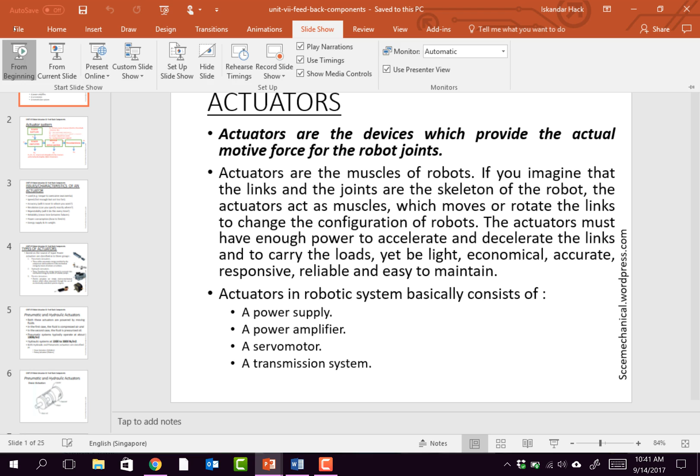So let me do the slideshow from the beginning. This is only like 25 slides. Let me go through them. There's display settings, let's duplicate that. Okay, so both slides have the same thing.

An actuator is a major part of any robotic system. We've already talked about the arms and the various other parts. I'm not going to review those, but the actuator is one of the things that will show up on the final exam, in this set of slides which I'll post later on VLE.

Come on in. Looking for the wrong class? As I said, I didn't have a pen to write on the board, so hopefully if anyone else comes, they were late and they missed us.

Actuators are what actually moves the arm. Typically they have multiple parts: a power supply, a power amplifier, servo motor, transmission system. These are all various parts. I didn't bring the motors with me, I meant to, but that's okay, you'll see them on the robot anyway.

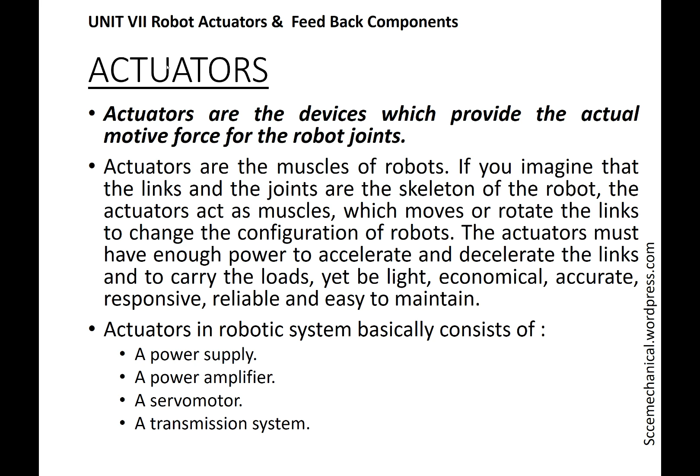You've already seen them. But again, typically when we look at the actuator system, we have a source of power. This source of power can be one of 3 types typically, although there are more: electric, pressurized fluid in terms of hydraulic fluid (although water can be used as actuation), or compressed air. Now, the robots we're using in this class use electric.

We have the input control power, usually electric. That's actually the information that comes from the computer, the microcontroller. So we have some power losses. I'm not going to get too wrapped up with that. This particular set of slides goes into more detail. My pen doesn't like this, I'll just use this instead.

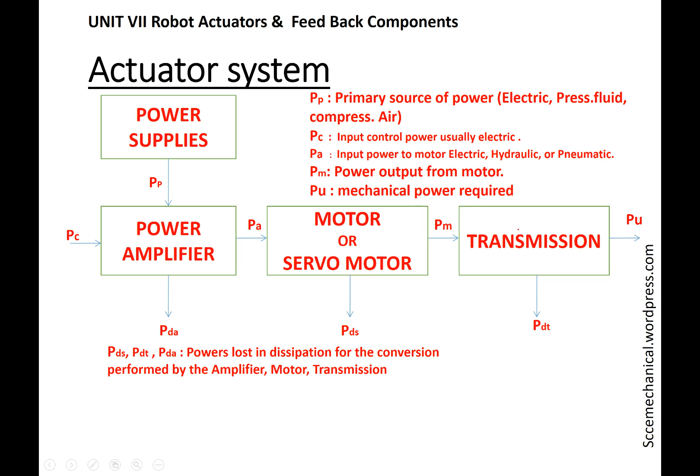These 3 all refer to power losses when we look at the efficiency. I'm not terribly worried about the efficiency for this discussion. Our power amplifier then goes to our motor or servo motor. Now, this motor may or may not be electric. So this power amplifier may actually open a valve, and then this goes into our transmission that actually drives the arm or the end effector itself. So this is a typical block diagram.

Some characteristics we have to deal with: what is our load. Obviously, you need a different type of motor if your goal is to pick up a tire on an assembly line than to pick up a small piece of an IC to make silicon chips. If you're at Intel making microprocessors, your actuator can be very small because you're talking something that weighs way less than 50 grams. But if you're putting tires on a car at Proton, you're looking at something that weighs 10, 15 kilograms.

Speed: fast enough, but not too fast. Obviously, if you're in manufacturing, you want this thing to move as quick as possible, but not so fast that you can't control it. Accuracy: accuracy is different than resolution.

Repeatability, accuracy, and resolution all three come together. Accuracy is how close you get to what you want. Resolution is how tightly you can control it. So if you're trying to put together an automobile, plus or minus 0.1 millimeter might be accurate enough for placing a door. If you're placing electrical bond wires on an integrated circuit, 0.1 millimeter is way too far apart. And that's where the resolution is - how accurate does it need to be. And the repeatability is how well you do it.

You've got a target right here, here's the bullseye. Accuracy means that I can get into the bullseye. Repeatability means that I can do it every time. Now, I can be very accurate, but be hitting all around the bullseye, never hitting the bullseye itself.

My resolution is poor right there. I'm very accurate and very repeatable. But if I got a grouping over here, it's very repeatable, but my accuracy's off.

I'll use a GPS as an example. A GPS is a global positioning satellite system that has 3 satellites looking down from space. Your car sends a signal out and gets a direction from each satellite, and it triangulates between those 3 satellites, more the better, to determine your position.

Now, these satellites are owned by the U.S. military. They're not put up there by some international UN committee. They were put up there for one goal only, and that was military purposes.

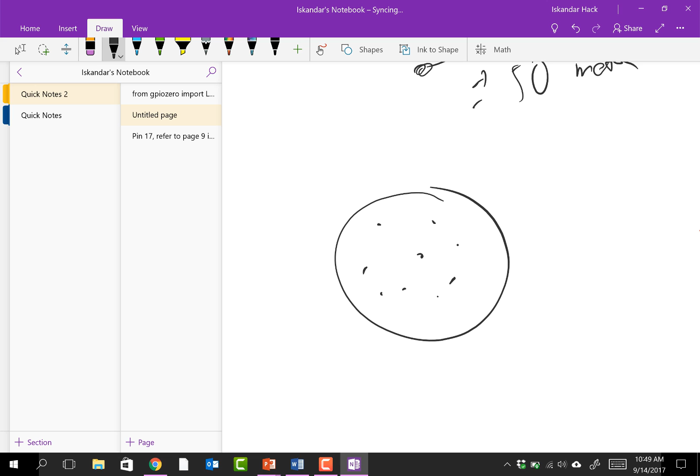Going back to why GPS was opened up: there was a South Korean flight supposed to go to the U.S. that went off course and flew over the Soviet Union because of an error in their navigation system. GPS was not open to civilian use at that time, and Russia shot it down. This was back in the 1980s.

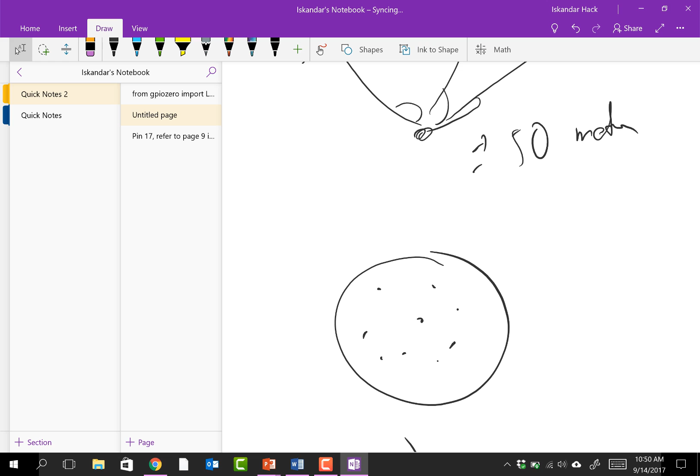After that, they opened up GPS for civilian use. But when they did that, they deliberately put in an error of plus or minus 50 meters. That's where this resolution concept comes in.

So repeatability is: is it going to work the same every time? One of the things you'll find when you do the lab I'm going to talk about is that these particular servo motors aren't very repeatable. They lack feedback.

Reliability means mean time between failures - how often does your robot fail. And power consumption - how do we feed it, how big a power supply we need.

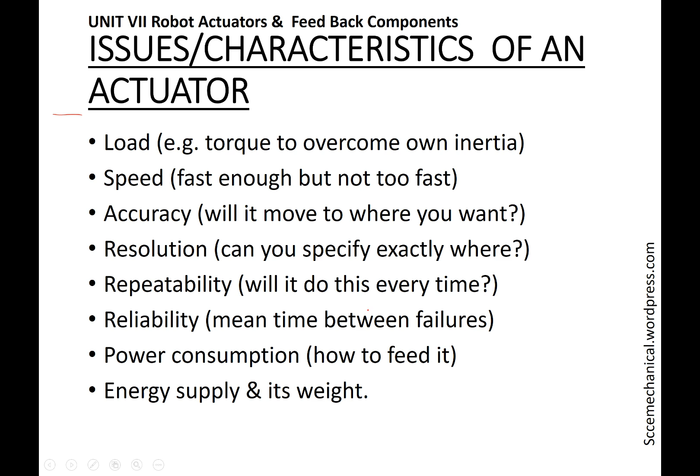Pneumatic actuators utilize pneumatic energy provided by a compressor. It performs as mechanical energy. This is very common in small robotic type systems. If you go to Intel, Freescale, or any of the IC manufacturers like Texas Instruments, you'll find that a lot of their actuators are pneumatic. The reason is because if you're dealing with ICs, the last thing you want is any kind of electricity around there.

Static electricity causes problems. And you don't need much energy - integrated circuits or chips are very light, so you don't need a lot of power. So they tend to be fairly small.

Hydraulic actuators use a type of fluid or oil. You'll find these in a lot of very high energy, power type things. In an automobile plant, they use a lot of hydraulic actuators.

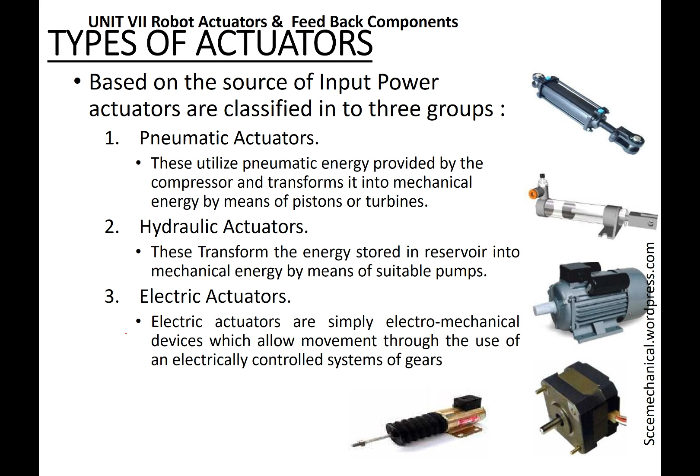Pneumatics and hydraulics are powered by moving fluid, and they both fall under the category of linear actuators and motors, the difference between that. You need to know this as well. By the way, I only have like a week or two of robotics, and we're going to switch over to industrial automation, where we'll talk about PLCs.

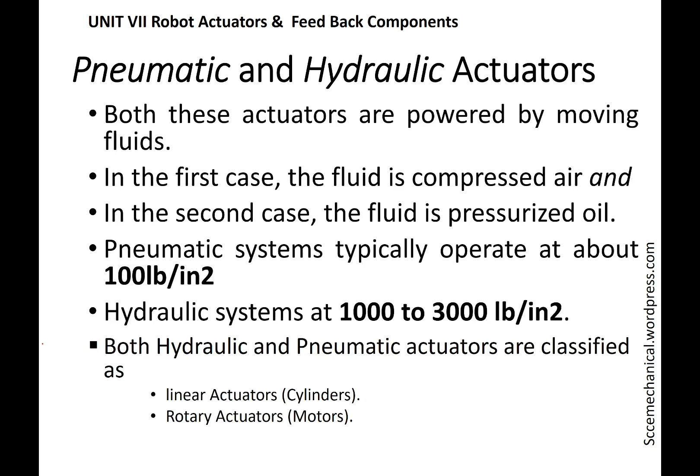So here's a linear actuator. You have a piston, a fluid port there that we push fluid into to push the piston out this way. This is similar to the way that the rack and pinion would work on your power steering.

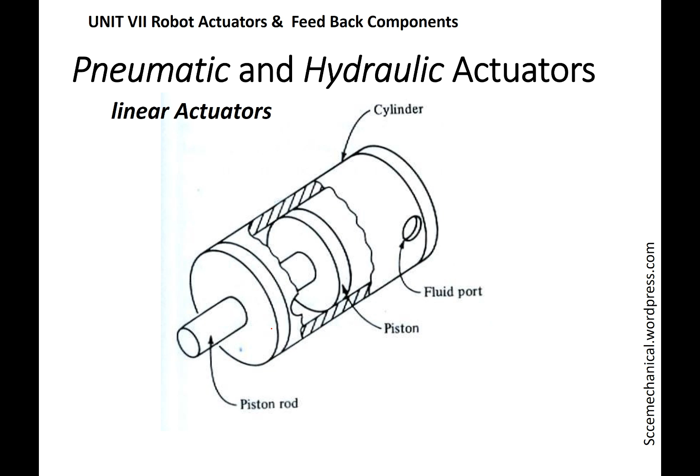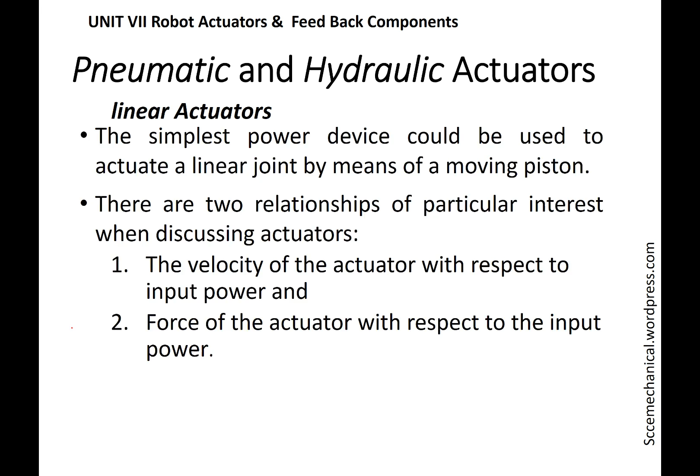Again, they both work on the same principle. Air is a fluid, water is a fluid, oil is a fluid. They all work on the same principle. So the simplest would be to actuate a linear joint by a moving piston. I'll skip all these formulas, you don't have to know the formulas.

This gets into the rotating, where we've got a vane that we push fluid into, and it comes out the other side, and this rotates it. Again, this is a type of rotating motor that uses oil or air as the actuator. Again, it's the same thing.

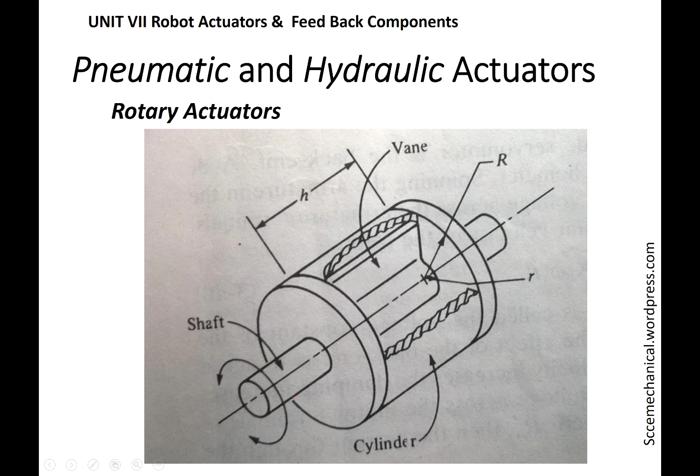So we've got this shaft that rotates left or right, depending on which direction we push the fluid into. Again, I'm not going to go into the formulas. These are pneumatic. This slide is one you probably want to look at, because I'll ask about the advantages and disadvantages of various types of actuators, and it's all covered in this slide.

What I was going to say, and I got sidetracked about the brake shoe factory, we would every now and then run into a problem where a hydraulic fluid or hose would break or start leaking. We would end up with a huge pile of oil on the floor. Or worse, somebody would get sprayed with high temperature oil and be injured. We've never had any serious injuries, although one guy got it in his eyes, and we got him under the eye wash fairly quickly. He didn't lose that.

Changes in temperature. This is not a problem in Malaysia, but it was a problem where I was working at the time in Indiana, where we didn't necessarily heat our plant very well. We had some machines around the windows, and it gets to minus 15, minus 20 degrees inside that plant. We're talking Fahrenheit, so considerably colder in Celsius. Although minus 20 is probably, minus 40 they're the same. It didn't get to minus 40 very often, but you'd see minus 30 Celsius fairly regularly. So if the fluid got to minus 30 or even zero, it would get really thick and sluggish and slow the motors down. That was a problem.

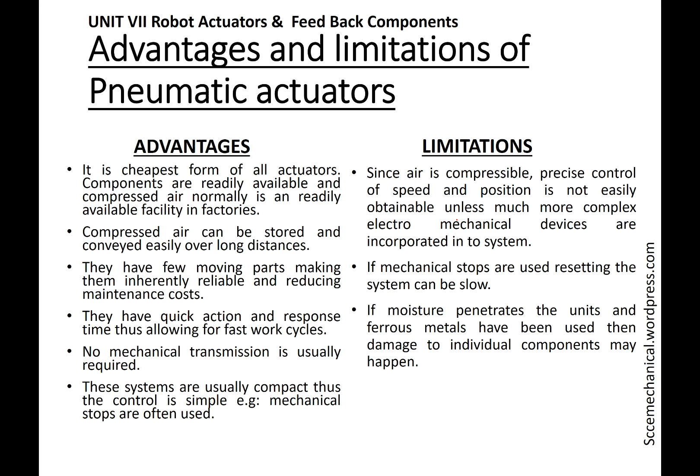Both the hydraulics and the pneumatics actually have a problem they don't mention here: the noise. Sometimes you'll hear that every time you use it. The hydraulics, it's pretty noisy at times.

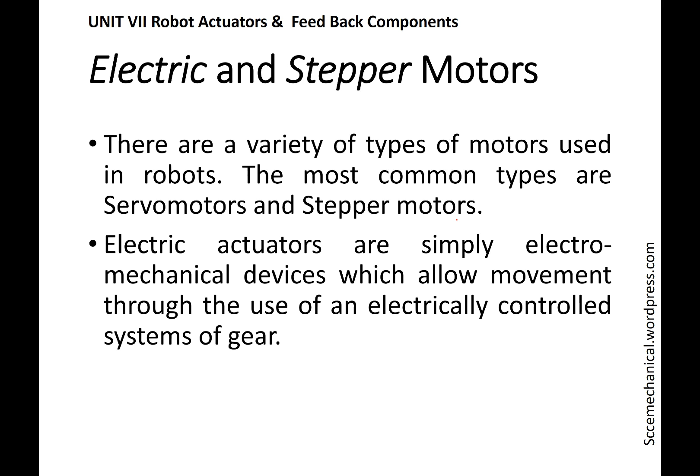So electric, there's basically three types of electric motors. There's the standard DC motors that they don't talk about much here, the servo motors, and the stepper motors. But they're electrical mechanical devices. You take lots of courses in motors, so I'm not going to go through a great deal of those. But they can be used for everything. You'll find motors in everything.

My car back in the U.S. had a little electric control on the seat. I could move it forward, backwards. My Perodua is not quite as nice, I have to move the seat manually. My mirrors I can adjust electrically though. Everything in my car, I don't have a sunroof. Sunroofs are a pain in the neck. Don't buy cars with sunroofs.

But the blower motors and the engine cooling fans are different than the seat adjustments and the power windows and the mirror adjustments, because those just spin and we don't care about how fast they spin as a general rule, we don't care about position. But obviously, adjusting your mirror so you can see the cars behind you electrically, you need to be able to control the position of that motor.

Same thing with medical equipment, x-ray equipment. I had the pleasure, and I use the term loosely, of getting an MRI back in April. MRIs use a lot of motors that rotate around and take pictures of your brain. They actually found a brain there, but they also found little spots where I killed it. But some of this equipment has to be very precise, especially medical equipment, and especially with robotic surgery being done.

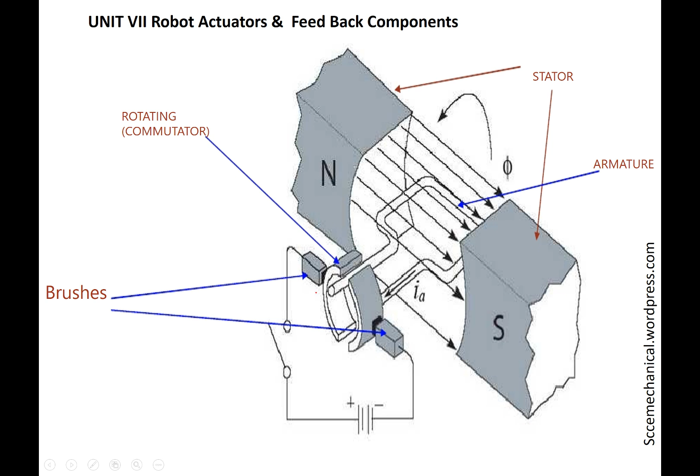That's basically how a motor or generator works. You have a rotating armature inside a magnetic field that will either, if we apply mechanical force and rotate it, act as a generator. If we apply electrical force, then it will rotate on its own, that's a motor. And this is a DC motor with brushes, a very basic DC motor.

Components, again, I'm not going to go through these slides. We've got three types of motors they talk about here. A DC motor just simply rotates, and we can control the speed of the motor various ways. The most common way is by varying the DC voltage to it. However, if we're doing microcontroller processes, we use something called pulse width modulation, which I'll talk about after the break. AC motors are a little harder to control the speed. Normally you use what they call a synchronous motor, and control the frequency.

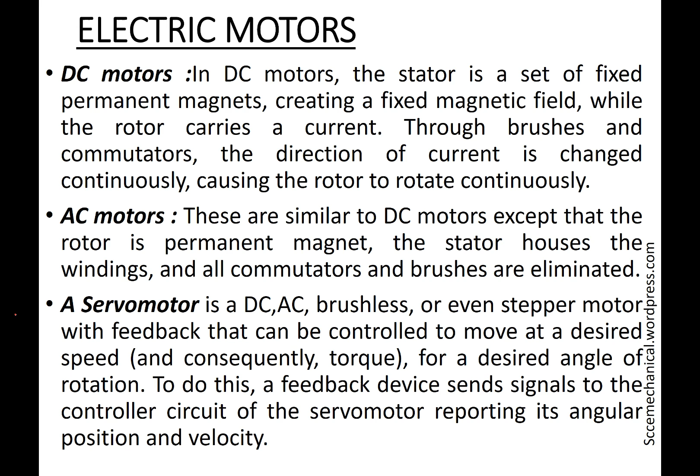A servo motor can be DC, AC, or even some other motor type when we have feedback. Now, the motors that we're using are servo motors, but we're not using any feedback with them. That's it for that topic.

Components of a DC motor, right there. Let's get into it.

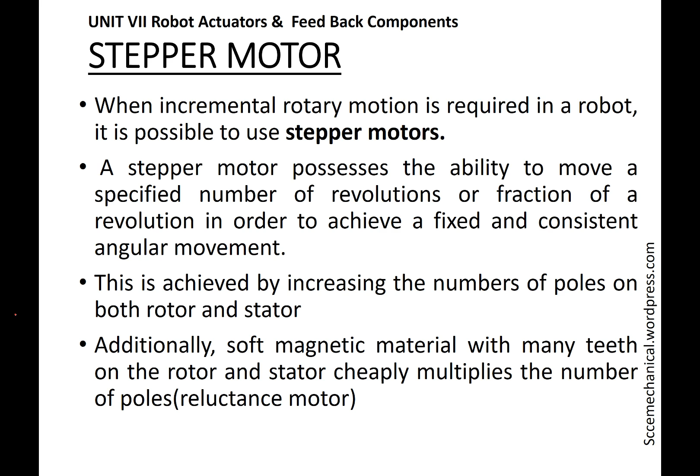We're looking at the step angle, the number of steps, and these are the number of poles. We have various poles, and we can energize two of them, then energize another two, which causes a turn. As we energize different pairs, you can see it rotating around, actuating various ones.

This is kind of a neat little slide. Again, I'll post the slides up on BLE.

With the stepper motor, we're not using stepper motors with our labs, but I've used stepper motors in the past for various projects, and they're a really neat way of controlling things.

My old satellite dish at my house used a stepper motor to control its position. The dish would point to different satellites in the sky so I could pick up different television stations. It was on a pivoting arm that would simply rotate, and I'd tell it to set to, say, 68 degrees, and it would point to a satellite 68 degrees off the horizon, or 90 degrees, pointing straight up, or 120 degrees.

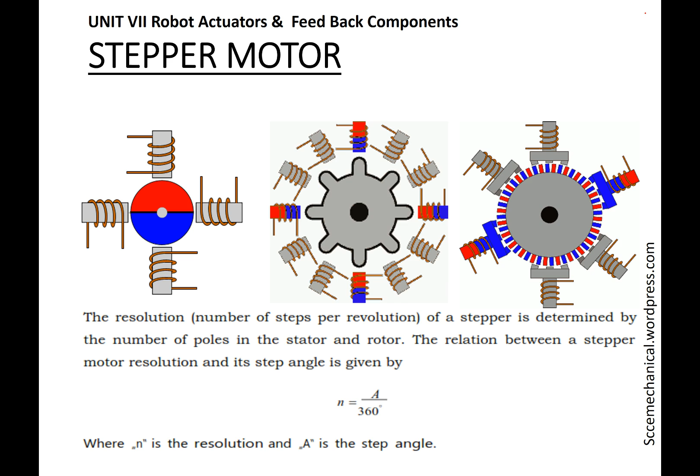But the problem you run into, since there's no feedback, is I'd have to calibrate it once in a while. Fortunately, my receiver had a calibration function where it moved to one direction, which was 0 degrees, then totally the opposite direction, 180 degrees, and it would recalibrate the processor to know exactly where it was.

Again, this covers the advantages of electric motors - they group all the electrical together in this slide.

We have a wide variety of power supplies. The basic drive unit is usually lighter than fluid power systems. They are more efficient, and they don't have any pollution - you don't have to worry about oil getting on the floor. They are typically more repeatable and accurate than fluid or pneumatics. Both hydraulics and pneumatics have to be calibrated.

And there are some limitations in terms of power, right there. The transmission system can be tricky, and they can't be used in some environments. I mean, if you're dealing with the handling of gasoline, you probably shouldn't use electric, because electric motors tend to have sparks when they move internally. So it's supposed to be environment-specific.

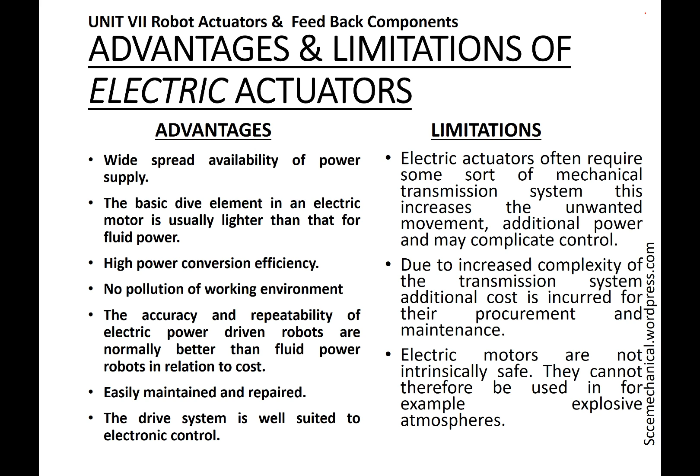Again, this slide, along with those other 2 slides, you'll need to know. Applications right there, and they give an example. This is for steppers, printers, the old printers. Now the laser printers don't use stepper motors, they use servos, but the old dot matrix printers did. Plotters, medical equipment, fax machines will use them too.

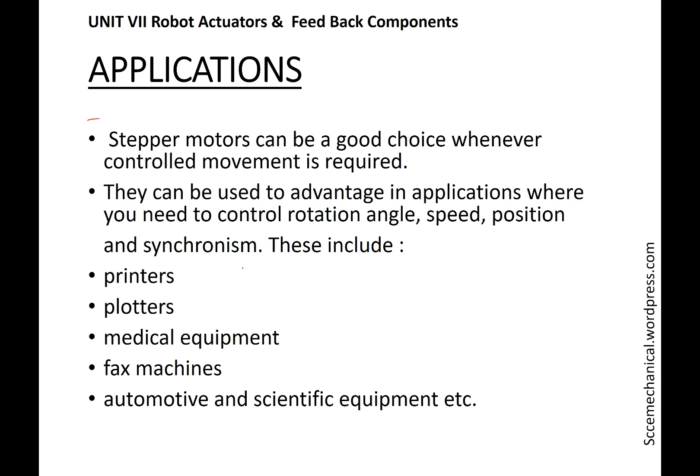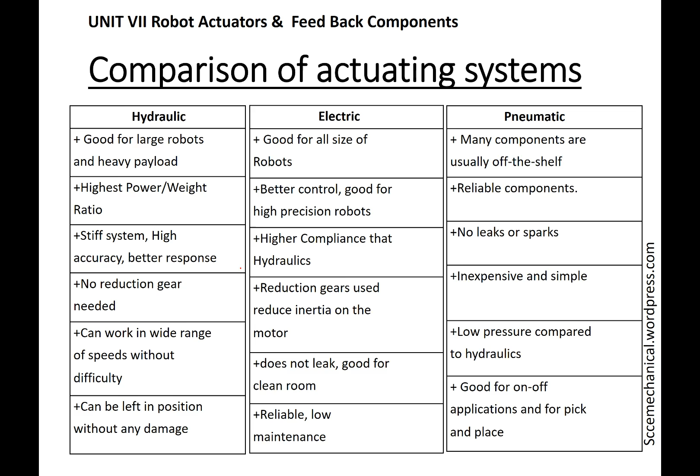Again, this is actually a fairly good slide right there. I'll probably steal parts of it when I write the final exam. Hydraulic, again, we get into all the various comparisons right there. So we've got 2 slides that go through that, and that's it for the slides.

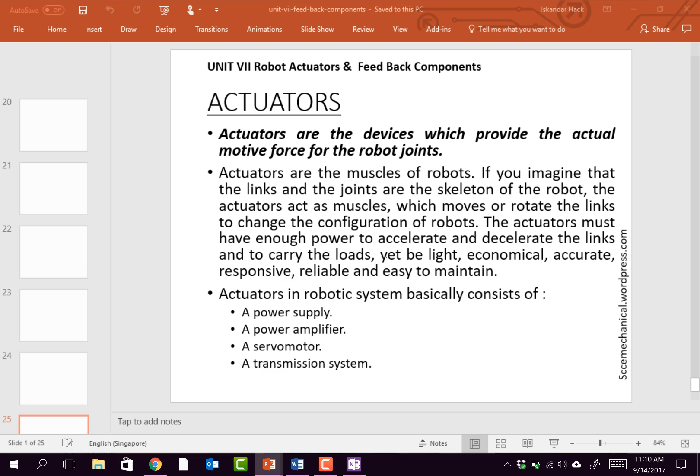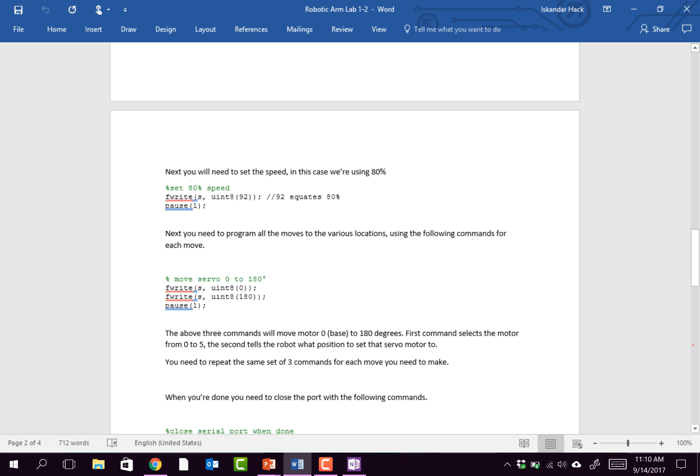Now I'm going to just talk a little bit about the lab. I'll come back, I posted the lab. You already did the first part of the lab. There is a little file I give you, and I go through step by step how to talk to the motor. We did this before, I did it in class, but now it's been 3 weeks, so I've really forgotten it, so I put it there.

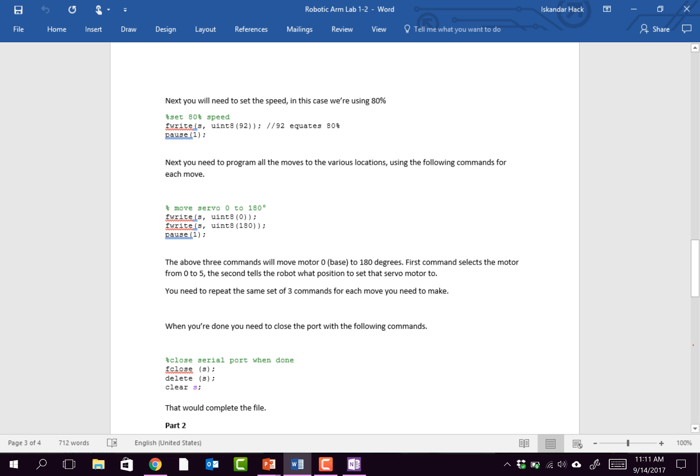And we'll meet next Monday in the lab. Hopefully everyone else will get there, and you'll start working on this. This kind of goes through, so this is part one, just playing with the lab. Just that you already did part one, but you'll probably have to repeat it.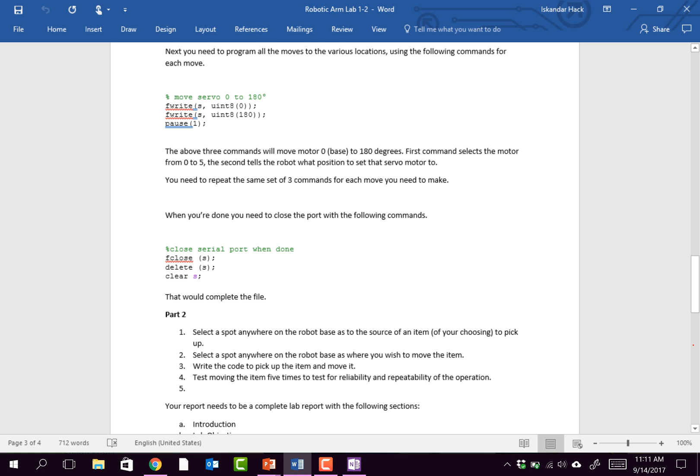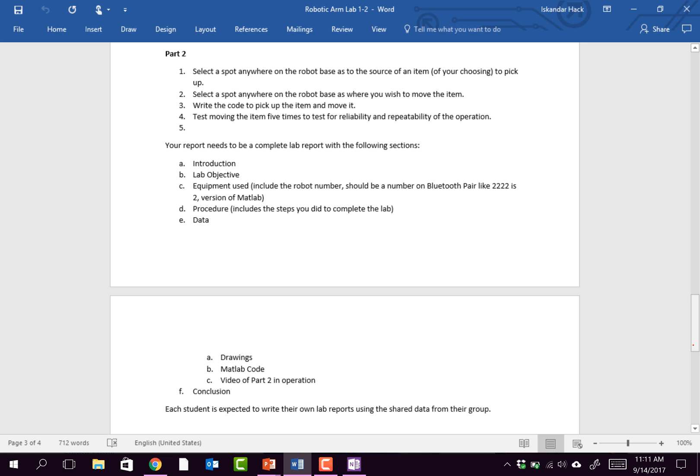Part two is I just basically want you to pick a spot, write the code to pick it up, move it 5 times, and then see how repeatable it is and how accurate it is. In other words, you pick up - I think last time I said something like a small object, using the concept of like a chess piece or something. It could be a small bottle, like the ladies would buy for nail polish, or a perfume bottle or something like that. It's got to be something small enough and light enough that you can pick it up.

And so what you'll do is write a lab report. Now you could do this in groups of up to 3, since there are enough robots where 3 people can grab a robot and do the lab. Each person needs to submit an individual report through VLE along with a video, and it has to be 2 minutes. Your video only has to show 1 iteration, because uploading the video to the VLE, it can't be very big. So pick the lowest resolution you can on your phone and keep it short, just one motion, just to demonstrate that.

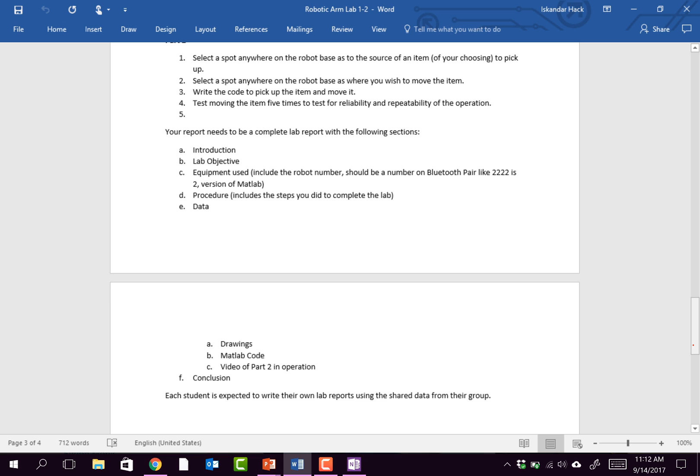So again, this basically says it's a standard report with introduction, lab objective - what is the objective of the lab, what equipment, what robot number you used (there's a number on the robot, say what number it is), what version of MATLAB, and the steps you did. The data is basically just a short description: the first time it landed here, the next time it was so many centimeters away, the next time so many centimeters away, and there should be 5 readings.

The first one will be 0 because that's your initial move, and then after that you'll have 4 other moves, and you'll say how close you were to the first one. That's part of the data. Your drawing, just a basic hand drawing, and then your MATLAB code and a video. If the video is small enough, you can include it in the Word document, otherwise you have to link it separately. And then your conclusion.

Each student is expected to write that. Do not allow your lab partner to submit 1 report and then come back to me later telling me you got a 0 for the lab because you didn't submit a report but your lab partner did. That's not acceptable. Each student must submit a separate lab report. This last line should make that clear.